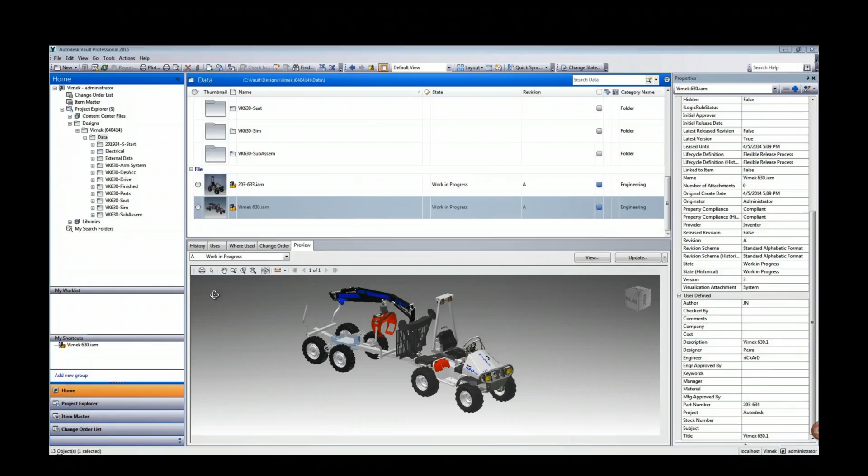The lower pane has several uses, one of which is displaying an interactive view of a selected design file. As the engineering manager, I need clear visibility on all aspects of the design and change process, and Vault will help provide me this. In order to initiate change and share information regarding some needed changes, I can simply drag and drop files or an entire folder of relevant documents into the Vault folder structure.

As files are added, I get the opportunity to identify the purpose of the documents, basically put a note for anyone that might be looking at that document to see. In this case, just a note for my design team to review and get an idea what the purpose is of the files.

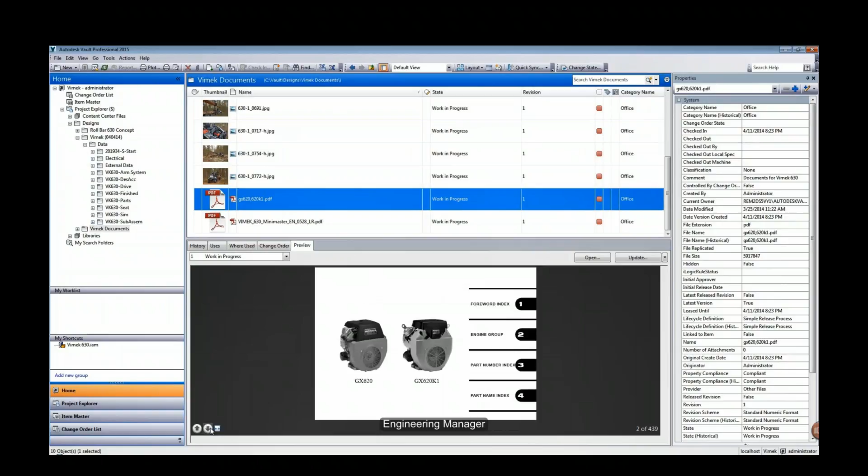Now we can see these supporting images are secured in the Vault, and they'll help define the context of the changes. I've also provided a product manual for the engine that we want to use as a replacement during this redesign.

Now my design team also has access to these documents. They're in the Vault. Next, I'll do a quick search to locate the existing design that's going to be impacted by the change. At this point, I'll create a quick shortcut to that design so it's easier for me to access the model and information in the future as this design change process moves forward, and maybe I want to check on progress.

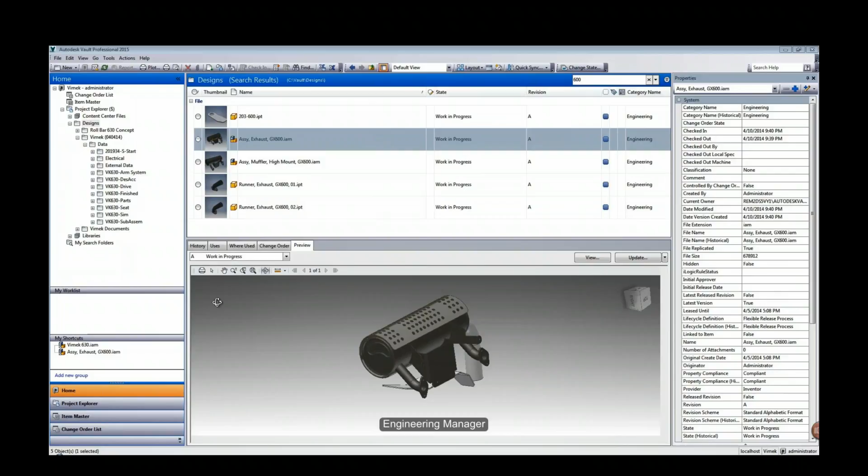By selecting the assembly, I can see a preview of it, and I get visibility on design history, so it takes me back in time, so to speak. I also get visibility of the components used in the assembly, and I'll be informed about the upper level assembly. So uses and where-used give me visibility on other designs that are going to be impacted by any change I make.

We'll create a shortcut to that assembly as well, the upper level assembly. As part of the initial review of the proposed change, I had one of the junior engineers on the team acquire a model of the new motor and just swap it into the assembly so we can take a closer look.

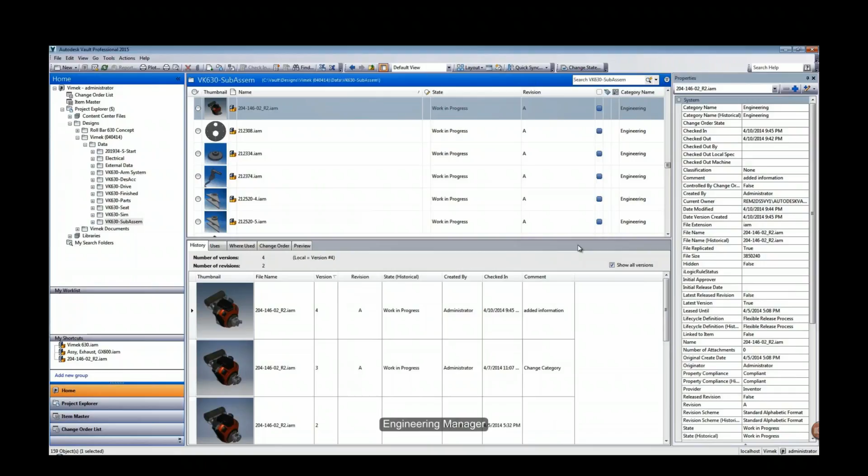We'll notice that those results confirm the viability. Looks like that's going to work for us using this new motor. I can see that we're definitely going to need to make some changes to accommodate this new engine.

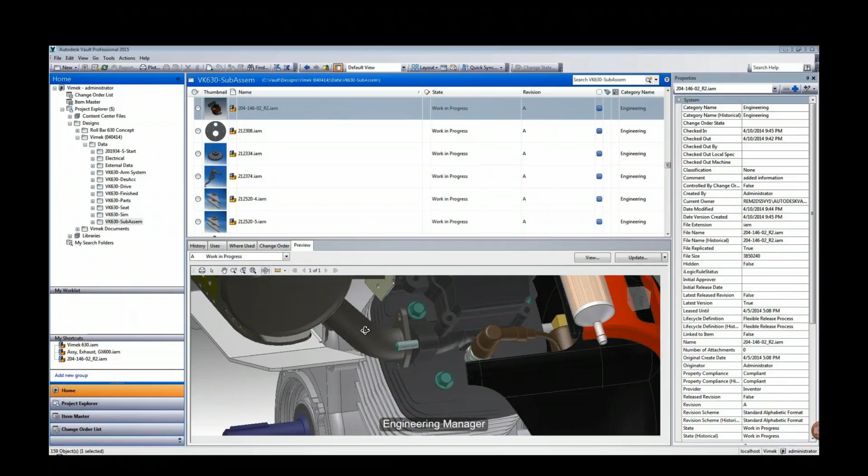Specifically, it looks like the muffler assembly and the related mounting flanges aren't going to work. So these changes seem like a reasonably good idea. It doesn't look too difficult. I'm going to green flag this and basically move forward on making this design change.

Notice that at this point, I've been able to accomplish all of this without having to use a CAD software. I can get the information I need to make the informed decision directly from within Vault.

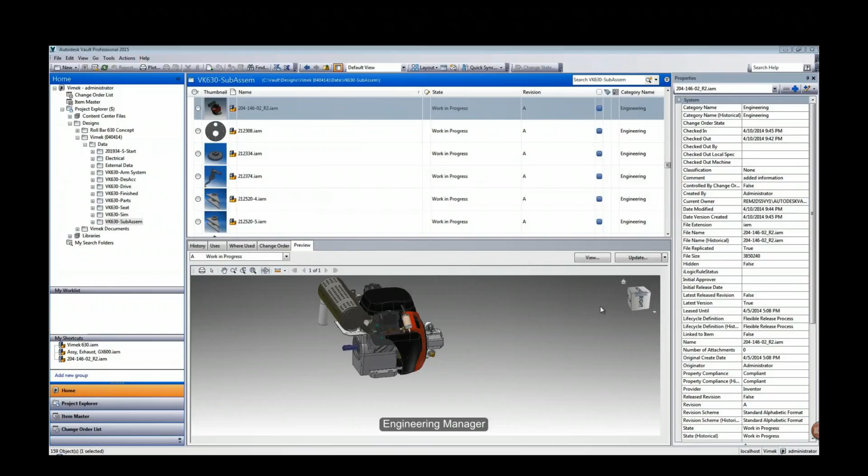Next, I want to initiate a formal change process. I'll do that by creating a new change order. Many of you might have this process manually initiated in your organization. I can use the ECO form in Vault to document and provide any detailed instructions important for the team to know and use to accomplish the needed revisions.

Also note that the engine assembly is automatically referenced into the change order. The change order also has a routing list, which I can use to assign an engineer I'd like to be responsible for the project. Now all that has to be done is to save and submit this change order, so that I'm really initiating or authorizing the work to begin within my department.

Now we're going to change roles a little bit here, and I'm going to play the role of an engineer that this work has been assigned to accomplish. So when I have work assigned to me via the change order, I get a work list email notification that I have a new ECO assigned to me, something that needs my attention.

So I can click the link that pops up there and take a look at what I'm being asked to do. It looks like I've been asked to reuse as much of this current design as possible, obviously helping to reduce costs. It's been a while since I've worked on this particular design, so I'm going to select the attached file and reacquaint myself with the design and figure out what the boss is asking me to do.

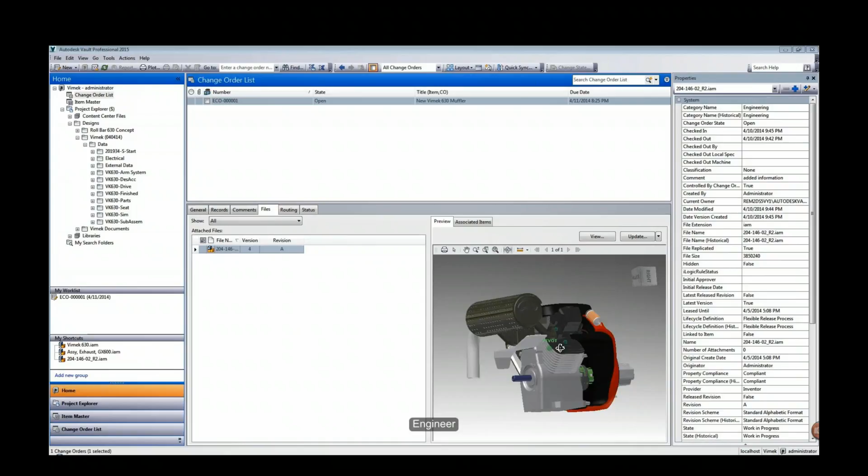It doesn't look like it's going to take too much effort to accomplish this task, but I still need to make sure I'm doing my due diligence and make sure that I know what other designs would be impacted by the changes that need to be made.

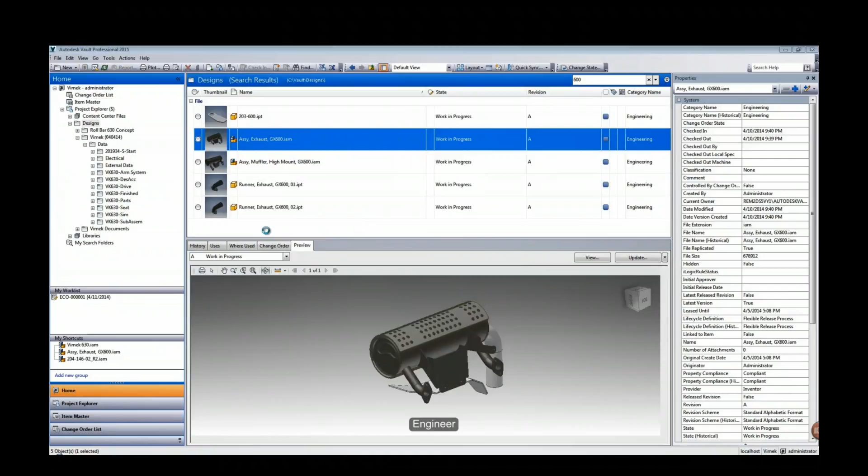So I'll do a search for the existing product design because I don't want to spend time doing any work I don't have to. After all, the bulk of this design isn't changing and is already modeled up and released. This is the type of change that's a great opportunity for me to use the Vault copy design capability, which allows me to copy a design quickly and easily, just with a right click on the source design to initiate a copy of it.

During the copy process, I've got the opportunity to put the new design in a separate project folder. I'm going to reuse as much of this existing design as possible, but some new components are going to need to be developed. The copy design preview panel gives me an opportunity to see the product structure, uses and where used, as well as to select the components of the design which I've identified need to be new, and then copy them.

It also allows me to easily identify the components that I want to be reused. For the items that are new, I can assign part numbers manually at this point, or I can use a predefined numbering scheme, or even just add prefixes and suffix characters to differentiate between the existing and the new. Unique part numbers are important, so that's kind of the takeaway there.

As I commit the specific actions, Vault is going to review the outcome, and in some cases it will provide detailed information about what's about to happen, and that's the case here. I'm making modifications to an existing assembly. The files are about to be copied or replaced. It's just a notification, and it's exactly what we want to do, so we'll go ahead and proceed past this informational dialog box.

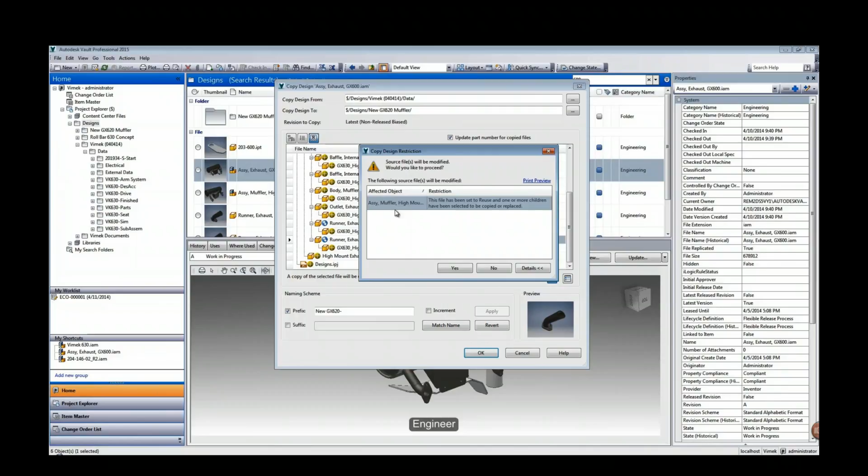Once the process is complete, the new project folder is populated with the newly copied and numbered files. This workflow allows me to create a new design without having to worry about other designs that may use the older muffler components and having them unintentionally modified in the process.

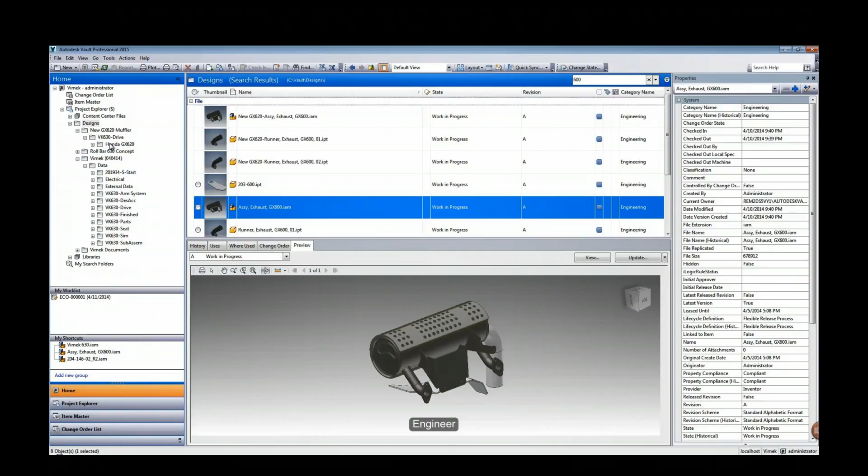Now that I've got the assembly prepared and the product structure looks good, I also want to attach this new assembly and the related new components to the ECO that was created by the engineering manager. This allows me to collect and track all the documentation associated with the changes.

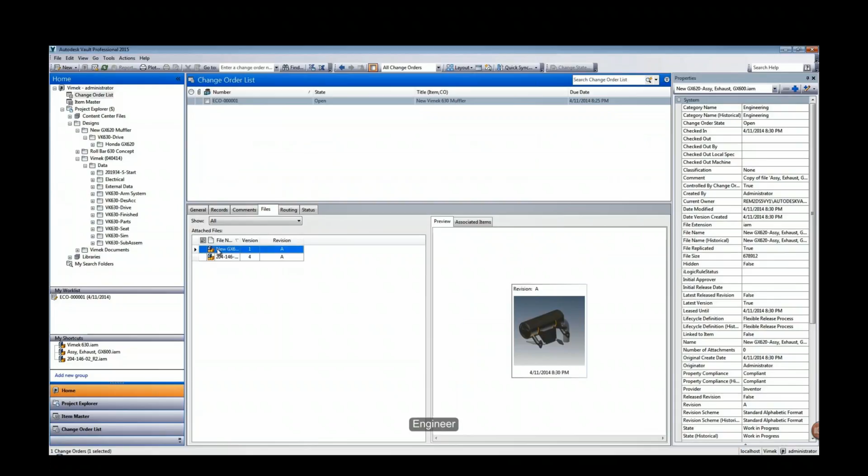So I'll do a search in the Vault for the ECO, and I'll attach the new assembly and the associated new components. Now I can easily review the related files that are attached to the ECO. At this point, I want to go ahead and let my boss know I'm working on this by updating the open change order and updating the current status for that change order.

Now let's take a look at the challenges manufacturing might be facing in our organization that Vault might be able to help us with. Our manufacturing team kind of struggles with having good communication with engineering, and some of that's on me, some of that's on them, and also purchasing is a little dicey sometimes, getting what we need in a timely manner and communicating there. Manufacturing also wants to help assess the manufacturability of products earlier in the process, as does the whole company, so we can cut off or shortcut or bypass issues that might arise in manufacturing late in the process.

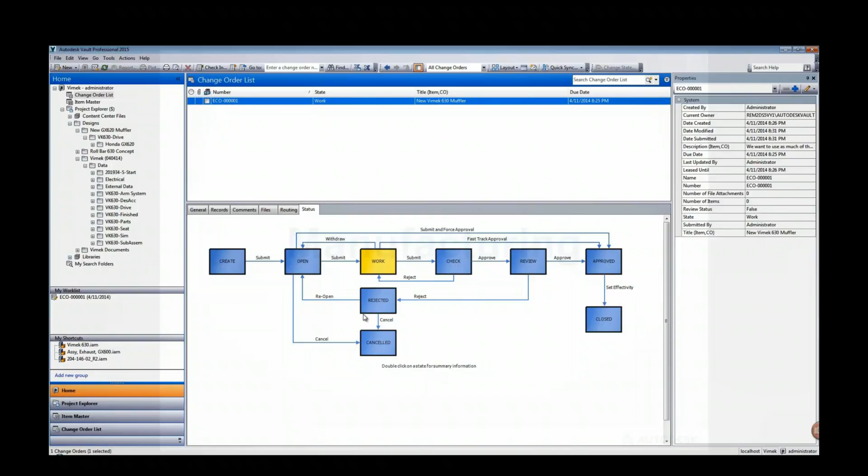So the use of Autodesk Vault's web client, I'll log in here, is an easy way to involve staff that's outside of the engineering team in the design process. The web client provides secure access and doesn't require a CAD license. The web client interface can also be customized to my personal preferences as to what's displayed there.

And the capabilities of the web client can be enhanced to include the management of non-CAD files by adding a Vault Office license. We can talk more detail about what that's like. But the reality is this web client is a great consuming tool for those that don't have or need CAD but want to give input.

You can see that the pictures and the PDFs that the engineering manager checked into the Vault earlier are there. And I can also do a search like the other staff members in the organization were able to do to access much of the same information that's available to the engineering team.

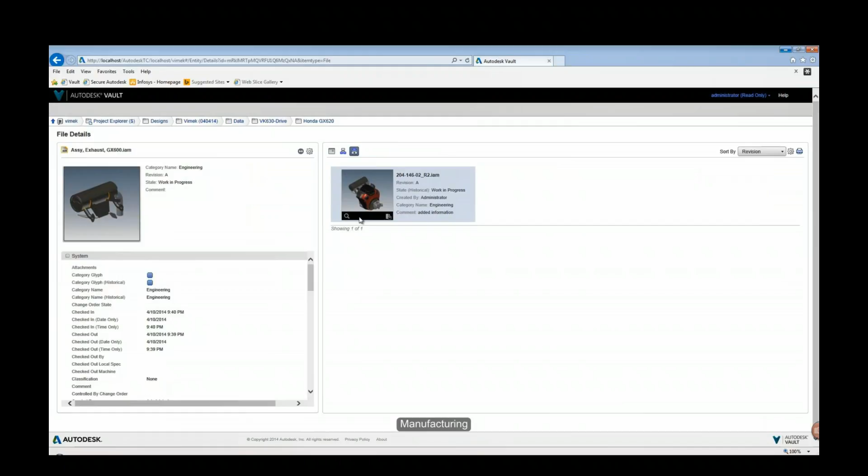Product information like uses and where used, it's important for me as well. The reason this information is even available to me is because of my role in the organization as the manufacturing manager. So Vault is role-based. For example, manufacturing shop floor staff won't necessarily have access to this work in progress level of information without being assigned a role which provides that permission.

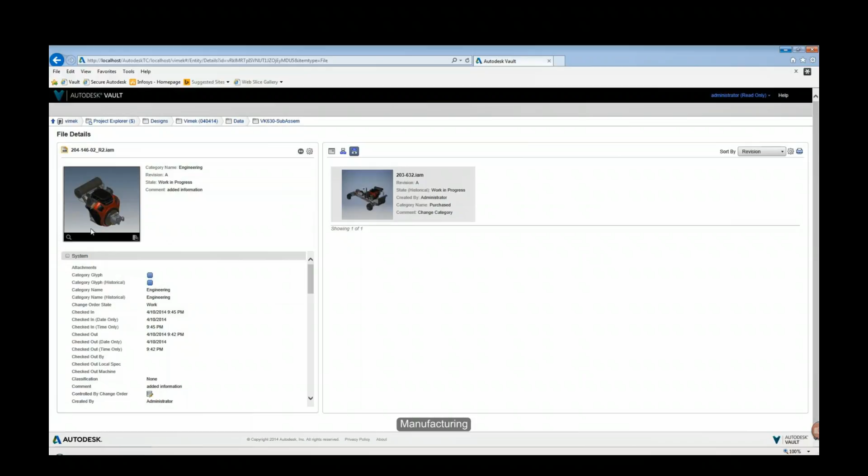I'd like to maybe take a closer look and review the proposed design from the manufacturability aspects. I can do that using the preview. Also, I might want to provide some manufacturing input and get clarification on a couple things regarding the proposed changes. With my Vault role, I have the required permissions to be able to open this model up in a design review environment.

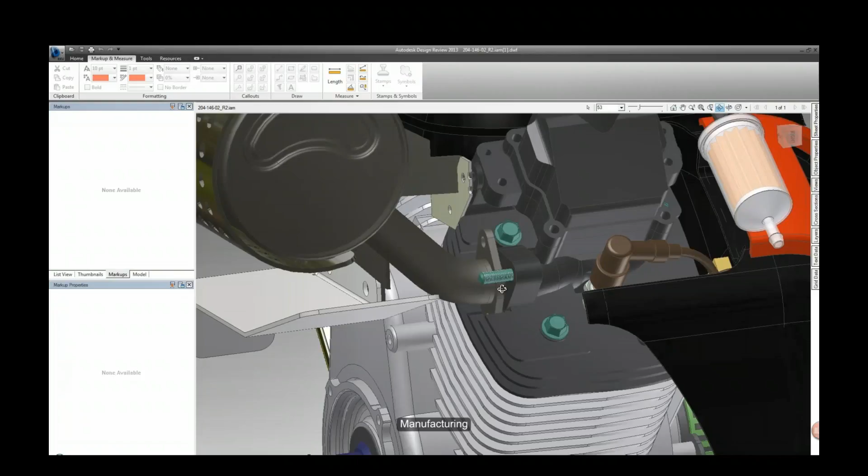I can pull some dimensions, add some manufacturing inputs, and ask for clarification on a couple of things. My markup and any feedback, questions, or concerns can then be provided back to the design team. In this case, I'm going to use email for this purpose.

As the engineer, I received the email containing the written feedback, comments, and markup that the manufacturing manager sent. Because I want to keep track of all the documentation related to this project, I want to check that email message into the Vault.

I can do that directly within Outlook, one of the third-party integrations I mentioned previously. I can create a folder for the specific purpose of storing all the markups in one place, or store them in the project folder—it's your choice. The Vault check-in of the email reports that 2 files have been added to Vault.

Let's take a closer look at that. Vault was smart enough to know to check in the markup as well as the email with no specific additional effort by me. It's identified as 2 separate pieces of data, and they're both vaulted.

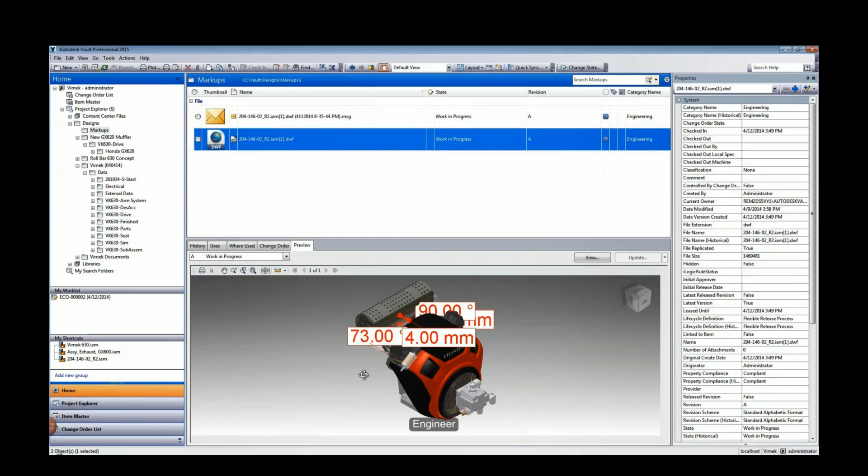I can easily review the feedback I got from manufacturing at any time and take it into consideration as I move forward with the design changes. So let's now go back to the ECO and open the file directly from there.

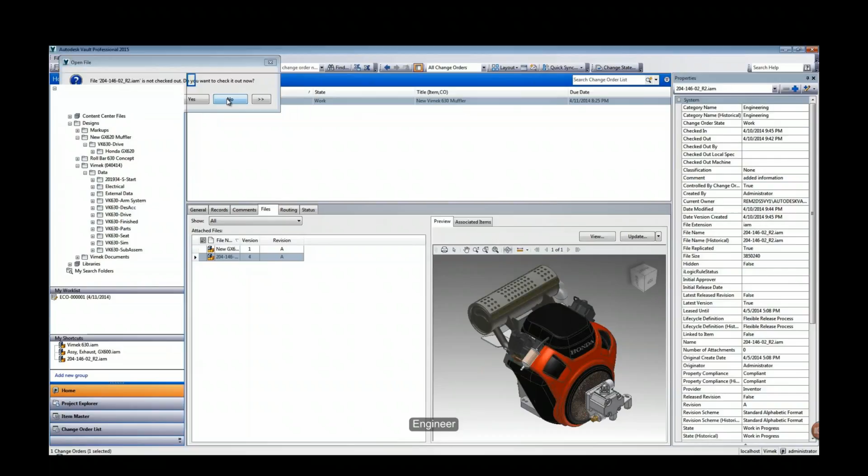There's no need—I'm getting a prompt here for checkout, but there's no need for me to check out the engine to do my work. So I'll dismiss that offer and start the process of replacing the old muffler assembly with the newly designed one and its components. I'll use the Inventor Replace Component command to do this.

I'll take advantage of a Vault search right within the command, which will allow me to find the new design I want to substitute into the assembly easily and quickly.

I can be proactive and check out the assembly for editing, or I can just make the changes and be prompted to check out as those changes are made. I prefer to do my checkout as early in the process as possible so my boss and other users can more easily see what I've been working on.

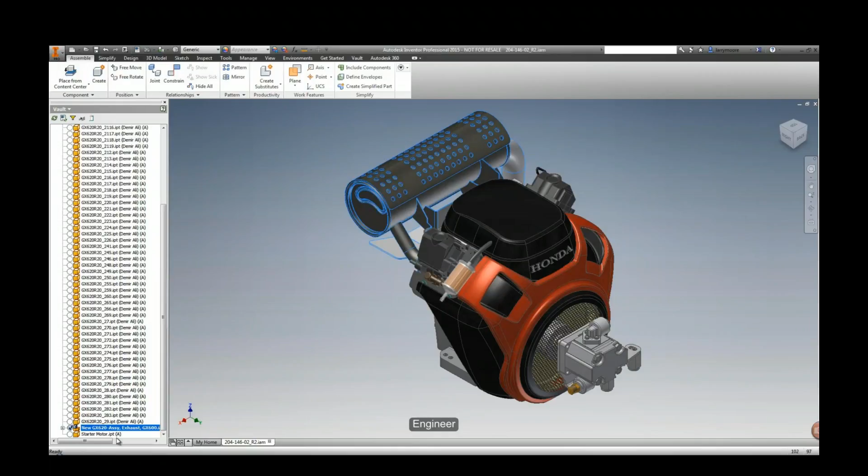With a Vault perspective on the CAD design here in the Inventor browser, I can see what's been checked out, what's been modified, and if other users are working alongside me to collaborate on this design, I can easily identify what they have checked out and what they're working on as well.

Next, I'll use Inventor's direct editing modeling tools to manipulate the exhaust piping and get the correct fit to match up the new components with the replacement motor assembly.

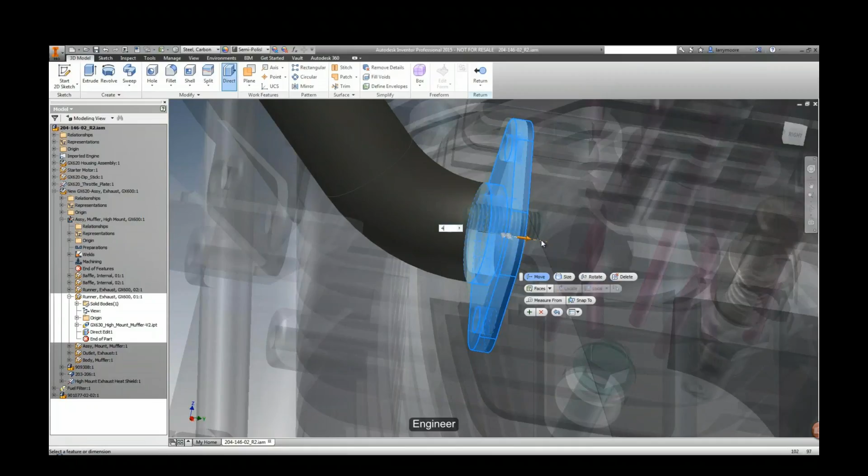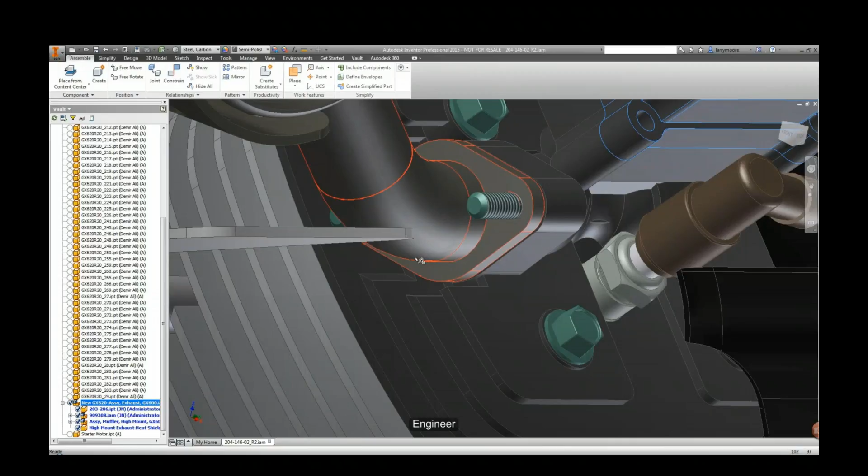Once changes are made, others working on the design get a notification, and they can choose to update and see the changes I've made, or not. It just doesn't make sense to update those changes if their work isn't having any direct impact on what I'm working on.

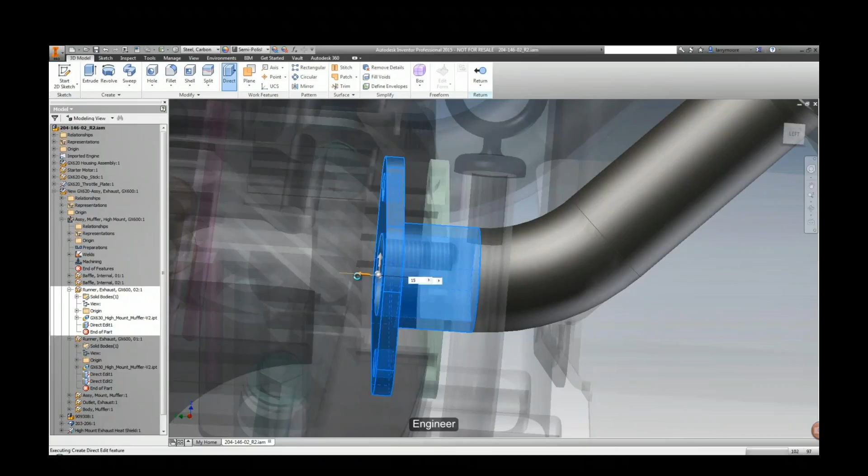This is one of several significant advantages to using Vault. Being able to improve your design process, make sure you have access to the latest and greatest design information, and really improve your whole design team's efficiency is part of what Vault helps you realize.

With the design changes finished here, I'll check the assembly back in.

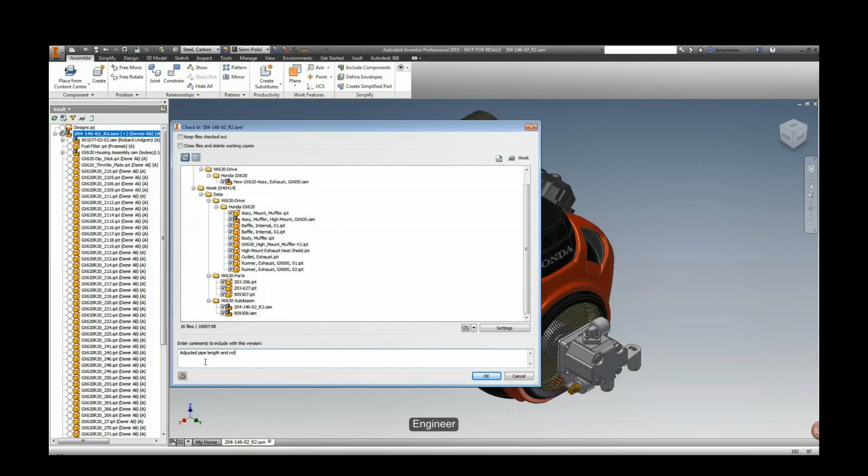And I'll also let the boss know that the muffler assembly's been updated so that the manufacturing and purchasing processes can begin. That notification and approval process can be initiated by going back here in Vault and moving the ECO through the desired lifecycle states.

In this case, I'm going to fast track the approval process, which I can only do if I have the correct role and permissions. As the engineering manager, I return to my desk and see an email and a Vault notification letting me know that the change order is completed and needs my attention for further processing.

All that's needed for me to do at this point is set the effectivity date for the new product release and create the item records for the new components, so that purchasing and manufacturing can get going on their planning and buying process.

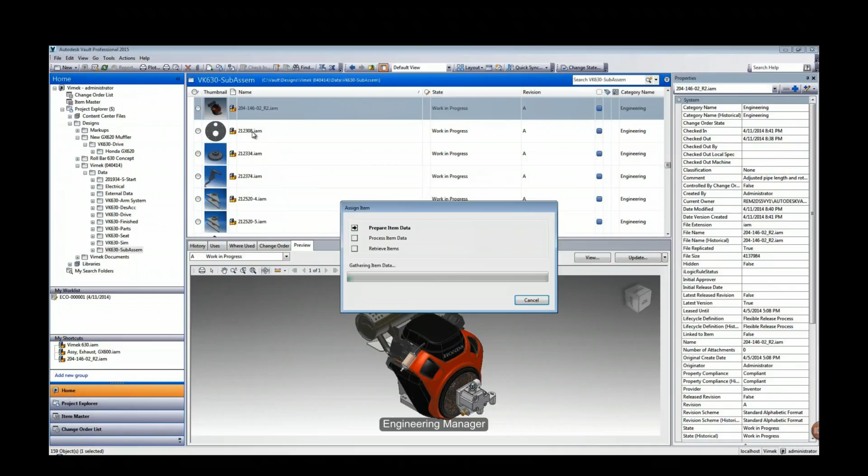I can accomplish the item creation with a right click. While in the bill of materials management, I can review the bill of materials to selectively accommodate longer lead time items, or I can just select everything and get the entire assembly and the related components into process.

The BOM contents can also be modified and reordered here by just dragging and dropping. And also, I can customize the bill of materials in a few ways. First of all, the item numbering can be adjusted here to meet my company's requirements.

And I can also adjust BOM contents and add things like service kits, accessory items, and manufacturing consumables. So you're getting a true, complete manufacturing bill of materials in this case.

A vault search yields one of the additional items that I want to add to this. It's a maintenance kit.

I'll expand the kit's bill of materials and take a closer look at the kit itself to ensure it's got the correct components for this design in it.

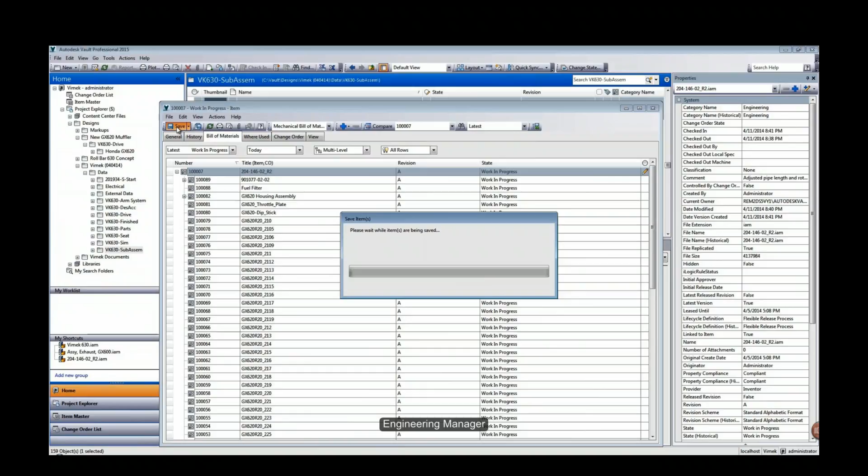And then I'll just simply close the item bill of materials, and it allows me to commit the revision numbers and do a formal release of the design at this point.

As I change the lifecycle state of these items to released, they're all then able to be sent out to our downstream business systems.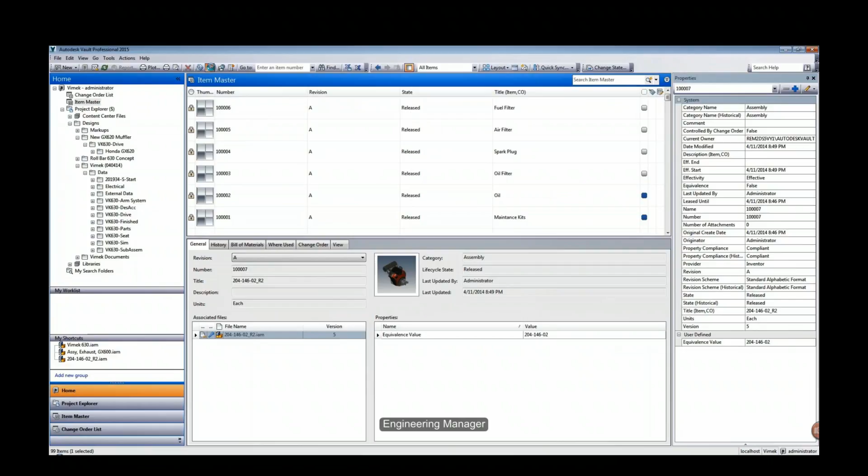I'll use the built-in ERP export capability that is in Vault and select the appropriate export options that match up with the capability of our ERP or MRP system.

And along the way, I get an opportunity to obviously name the exported file and put it in a particular location.

And then I also get a chance to do a preview on that export of the actual what it's going to look like that will be consumed in the ERP or MRP system.

And that's it. Start to finish, a quick look at the design and change process in a Vault-enabled environment.

Now, I covered a lot of information pretty quickly there, so we'll do a quick recap before opening things up to questions. We used Vault to store and manage both CAD and non-CAD data.

We started and managed the change process with an ECO. We collaborated with both CAD and non-CAD users.

We copied an existing design so we didn't have to start from scratch on a similar design. We easily reused existing design components that help us save time and reduce costs. We also tracked the changes to the design data as the design change progressed.

We got and captured early input from people outside of engineering. We managed and tracked the design approval, the bill of materials, the release of the design.